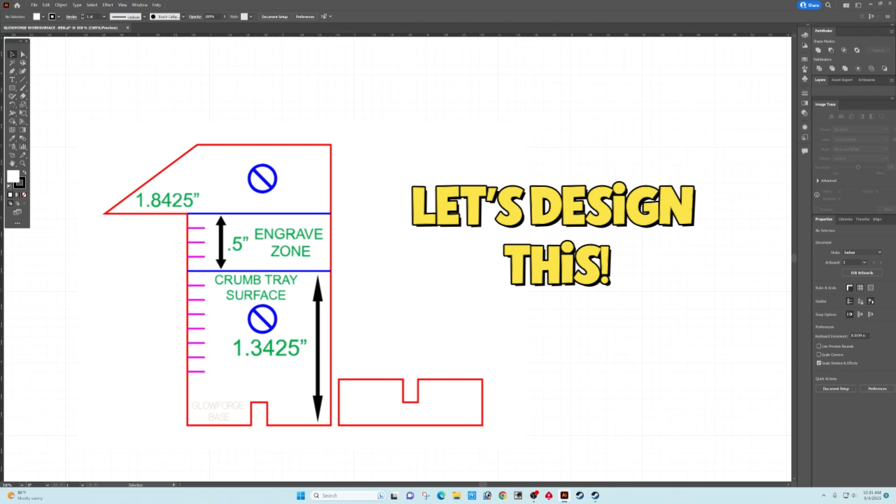Okay guys, I went ahead and opened up Adobe Illustrator. So let's go ahead and get started. The first thing I'm going to do before I do anything is I'm going to click on View and I'm going to scroll down to Smart Guides. I'm going to make sure that Smart Guides is checked because we want this Smart Guides tool to be enabled.

This Smart Guides will help us visually to align our paths together, because visually when you start to align two paths together, you'll have some pink lines that will light up to let you know that the two lines are exactly directly on top of each other. So it really does help. So let's go ahead and make sure that Smart Guides is enabled.

And another thing I want to say is I'm not an expert on Adobe Illustrator. I've only been using it for about 1.5 years. And if I can make this thickness gauge, I know you can too. So let's go ahead and continue.

Now I'm going to go ahead and select the rectangle tool, and I'm going to make a small little rectangle. And I want the width to be 1.25, which is 1.25 inches. So let's type in 1.25 inches. And I want the height to be the measurement that we calculated for the base of the Glowforge to the top of the crumb tray measurement.

And that came out to be 1.3425. But you're going to enter in the measurement that you calculated for your crumb tray height. So let's go ahead and type in that number, which is 1.3425 inches. So now we have our rectangle. So next, let's go ahead and copy this rectangle. So edit, copy, edit, paste, and let's paste this rectangle right over the top.

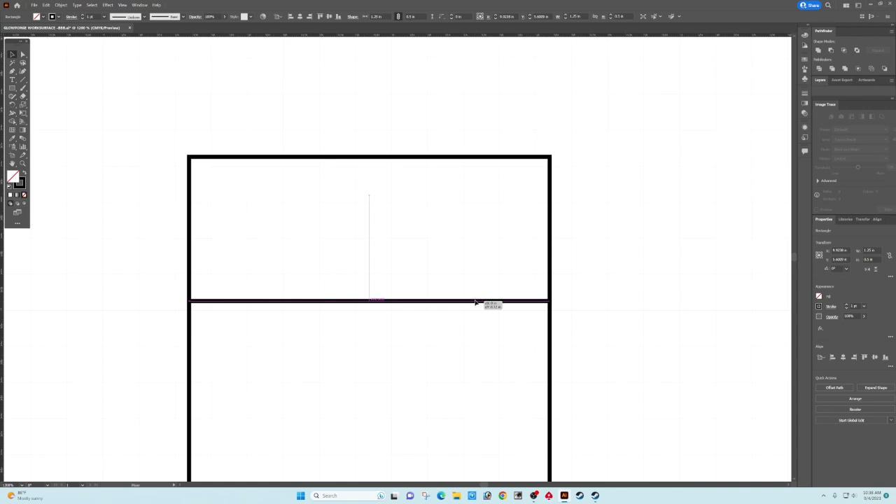So what I'm going to do now is I'm going to select the rectangle and I'm going to slowly start to slide it over, and you'll see when I get to the right placement, bam, right there you'll see that pink line light up. That is letting you know that the paths of both of these shapes are perfectly aligned. So let's go ahead and do that again. Let's bring it over. Bam, perfectly aligned. Now these two shapes are perfectly aligned.

So the next thing I want to do is select the top rectangle, and let's do edit, copy, edit, paste. And now let's place this bad boy up on top, and I want this measurement to be 2 inches wide. So let's change it to 2 inches for the width. And I want the height to be 0.6 inches. And let's make sure that the stroke size is 1. Okay, so now all the stroke sizes are the same.

So just like we did before, I'm going to zoom in on this. I'm going to bring this top rectangle and I'm going to line it up. You can see the Smart Guide lines kicking in. And I'm going to bring it down and wha-bam. So let's continue. We now have the basic shape of our thickness gauge. So the next thing I'm going to do is I'm going to make the tick marks.

So let's enable the line segment tool and let's press and hold the shift button and let's make a line that is 0.15 inches. And there you go right there. So we have one line made. So now we'll go ahead and select the selection tool again. And let's go ahead and copy that line.

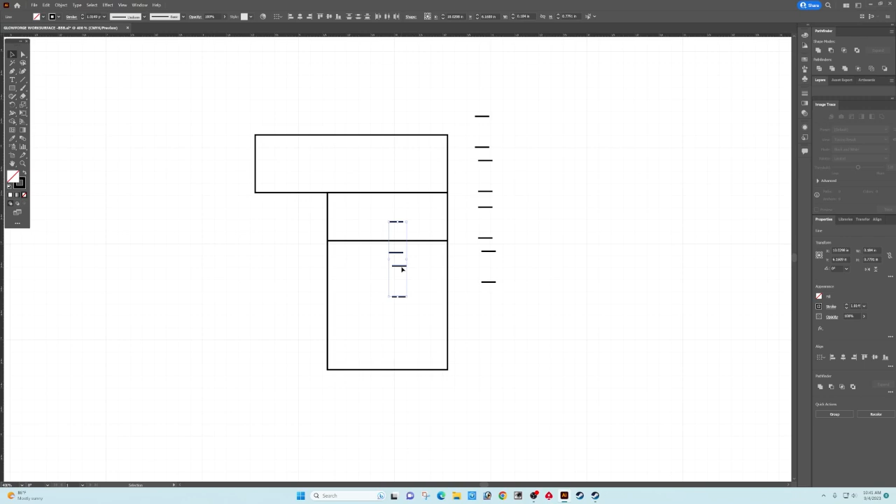So now that I have four, let's select these four, copy, edit, paste. Now I have four more, and let's go ahead and paste another four more. We're going to need a total of 12, so we have 12 right here.

Notice they're not spaced or anything, so let's go ahead and select them all. Let's do a horizontal align left, and now they're all aligned to the left. But I want them aligned vertically 1/8 of an inch apart as well, and this is how you do that.

Let's go ahead and select them all, and let's go over to this align window. There are 3 buttons on the bottom right corner of that align window, let's open that up. Here you can see align to, you have 3 options, and let's go ahead and say align to key object. It's going to align to the first tick mark.

Let's click that, and when you click it, it opens up this little window, and all you have to do is give it a measurement on how far apart you want these tick marks to be. I'm going to type in 0.125 inches, which is 1/8 of an inch. How do you want to space these, horizontally or vertically? Well, I want to do them vertical, so let's select vertical distribute space.

Now I'm going to click this, but before I click it, take a look at the lines. So when I click it, bam, they all get spaced vertically 1/8 inch apart. That's great, so let's go ahead and continue.

Let's go ahead and select all 12 of them, and let's change the stroke color from black to magenta, because I want these to be seen differently in the Glowforge based on color, which means it'll be a different process. Now that we have them all magenta, let's go ahead and group these together. Now the 12 tick marks are grouped together.

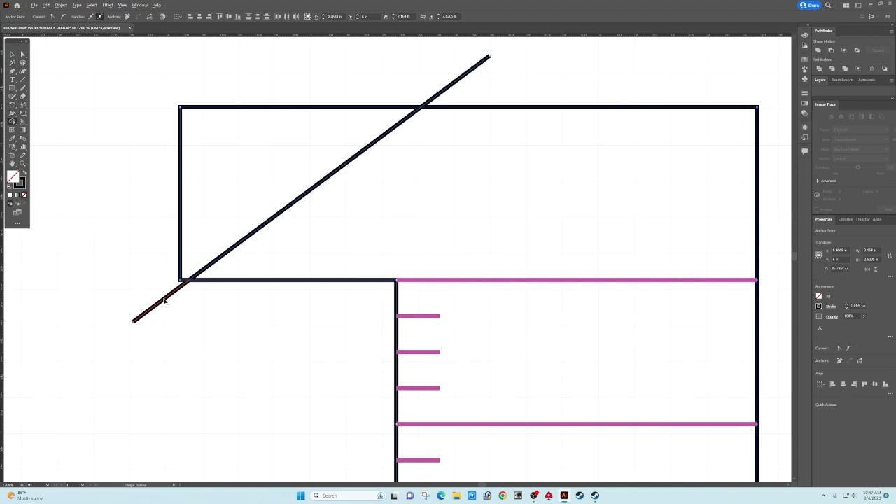So once we click on it, I'm going to press and hold the Alt button as I hover my cursor over the lines, and these lines are the ones I do not want. So when I click on it, the line will be deleted. Let me zoom in a little closer so you can see.

With my shape builder tool still selected, I'm going to hold Alt and hover over the line and it turns red, and when I click the left mouse button, bam, it gets deleted. Let's go ahead and do the same thing for this top line over here. Click and hold the Alt key, hover over it, and click it, it gets deleted.

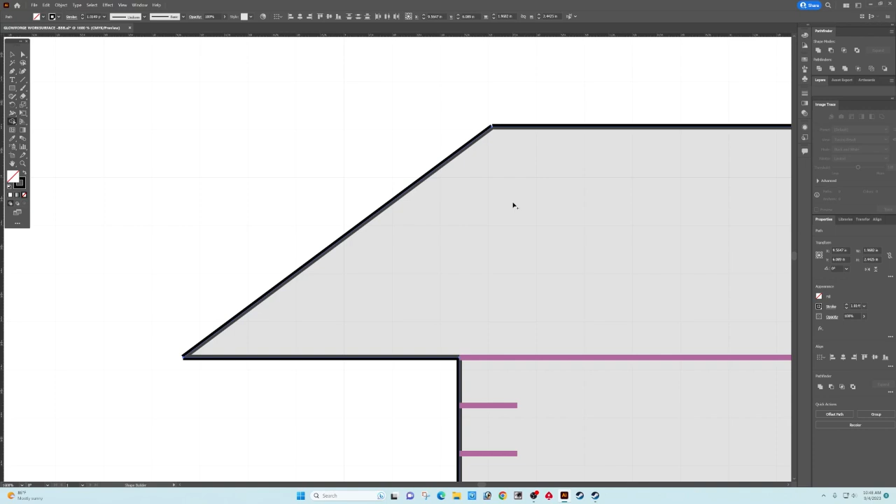Now you can see right here that this corner and this corner are open, so we want to join those paths. So I simply bring the cursor down into the triangle or into the rectangle, and when I click on the gray area, you can see how it joined my paths together. So right there we have the basic shape of our tool.

And the next thing I'm going to do is look at it, admire it, and let's go ahead and go on to the next step.

Okay guys, the next thing I'm going to do is make the stand that's going to allow this thickness gauge to stand on its own. That little stand is going to have a notch cut in it, and I'm also going to cut a notch on the bottom of the thickness gauge. When these two notches interlock, it's going to allow the thickness gauge to stand on its own. So let's go ahead and make that right now.

Let's go ahead and click on the Rectangle tool, and I'm going to make a rectangle. I want this rectangle to be the same width as the thickness gauge, and we've already determined that measurement is 1.25 inches. So let's change the width of this rectangle to 1.25 inches, and I want the height of this rectangle to be 0.4. Let's go ahead and make that change right there.

And there it is. Okay, so before we go any further, let's go ahead and select the selection tool, and let's move this over just to make sure that it fits. According to the smart guides, it is a perfect fit. So let's go ahead and make our notch now.

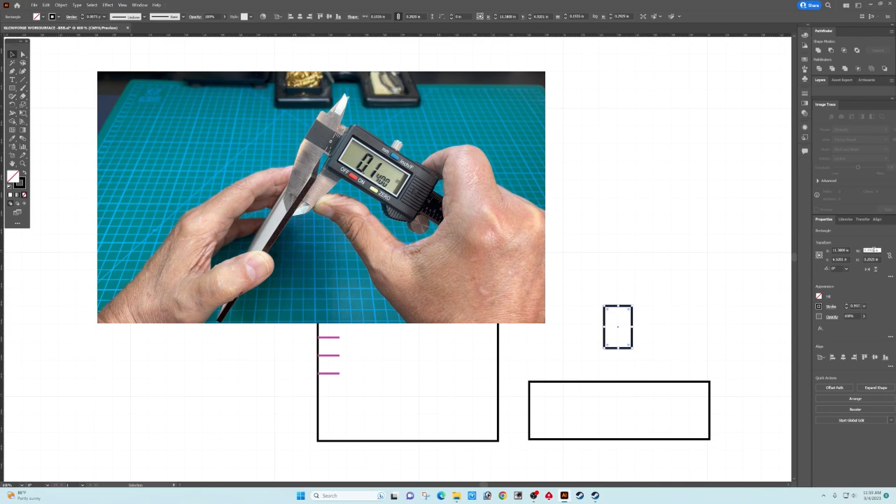So we're going to select the rectangle tool, and let's make a little rectangle. The width of this notch has to be the same width as the thickness of the material I'm going to cut this thickness gauge out of. I already measured the thickness of the material I'm going to use, and it's 0.14 inches. So I want this notch to be 0.14 inches, so I'm going to enter that in, 0.14 inches.

And we have that set. Now I want the height of this notch to be half of the height of this little rectangle here. So this rectangle here is 0.4 inches, so I want this one to be 0.2 inches. Let's go ahead and type in 0.2 inches. Now we have the size of the notch, so let's go ahead and put that there.

Let's go ahead and make sure that the stroke is 1 point on both of these, and I'm going to select both of them. Using my alignment tool, I'm going to select vertical align bottom, and now select horizontal align center. Where is that at? It's right there. Bam. Okay, so now it's center aligned and it's aligned on the bottom.

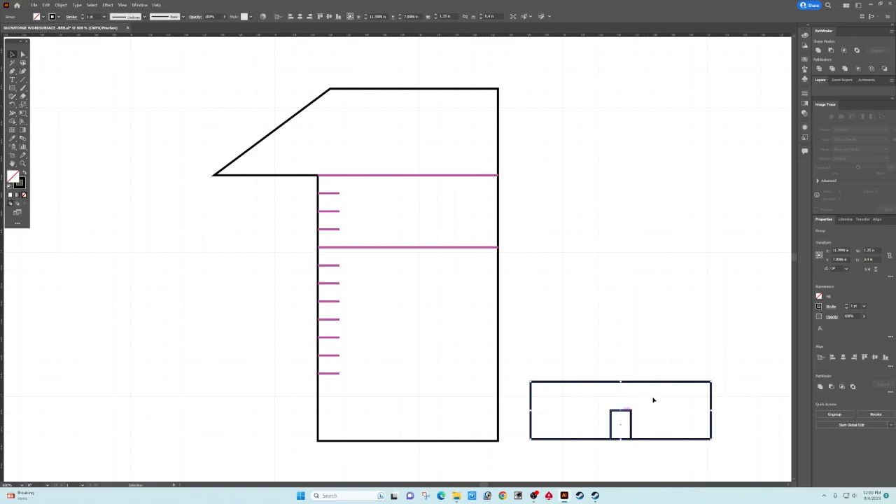So now that we have that done, let's go ahead and select both of them and group them. Once they're grouped, let's go ahead and copy them, do a copy, and let's do a paste because I'm going to need another copy of this. And you'll see why in a second.

Okay, so now let's go ahead and get this piece here that's grouped. Let's enlarge it a little bit, and let's go ahead and position this and align it right there. You can see with the smart guidelines that it's aligned center and on the bottom. So there we go. Now that we have it positioned, let's go ahead and select it and ungroup it.

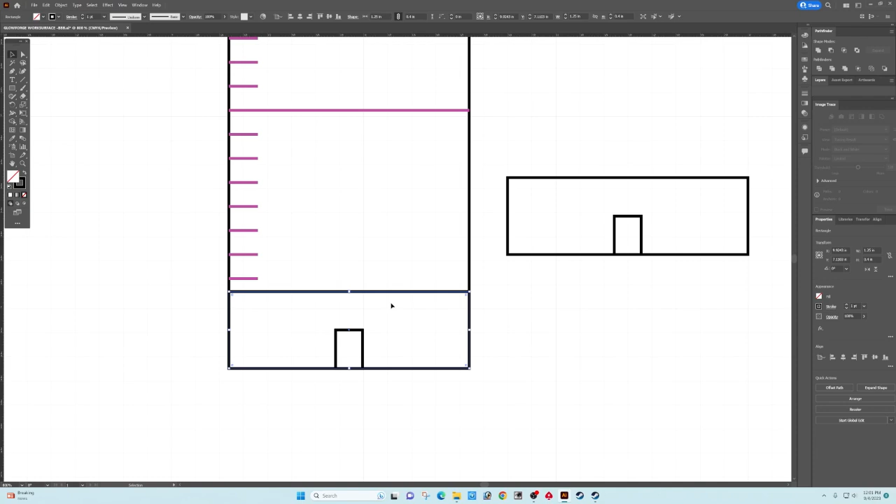Let's select the big rectangle and delete it. So now that's gone, and now we're going to want to use our shape builder tool.

Let's go ahead and select direct selection tool. Let's select this area here, the small rectangle and the larger rectangle. Let's click on shape builder tool. Now I'm going to press and hold the Alt button as I hover over the line that I want to delete, so you can see it turned red.

I'm going to click the left mouse button and it now deletes that line. So now if I hover over and change this area to gray, if I click on it, you'll notice, let's zoom in a bit, these two corners close the path. So let's click there, and now it's joined the paths together, which is a good thing. It's going to make cutting one easy step.

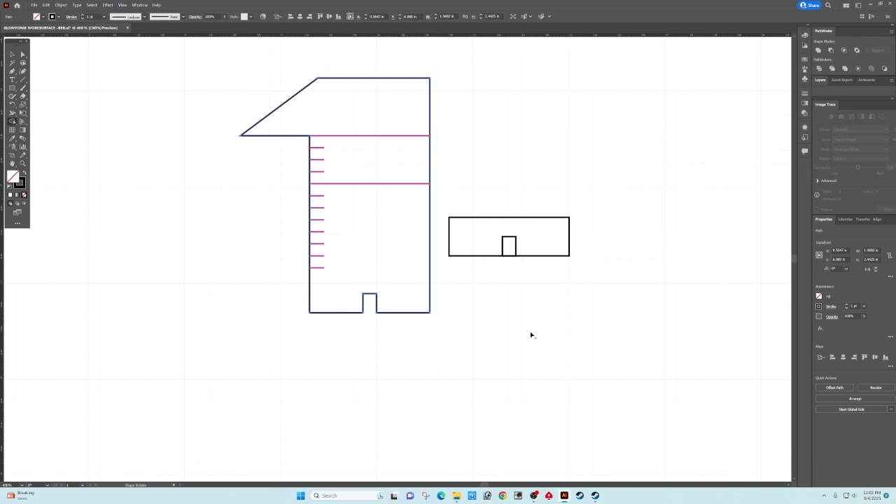Okay, so now that's done, let's concentrate on our little stand. Let's click on the selection tool and bring that down here. This is what I'm going to do. Let's ungroup it. Now that it's ungrouped, I want to make this little rectangle align to the top because we want it on top. So let's go to align, vertical align top, and let's do that. Now it's on the top.

Now that's done, we're going to change the width of this notch because I want the two notches to fit snugly. This little area here is going to fit freely, but I want to change the width of this one to adjust for the curve so that in one direction it's a tighter fit. Let's change that from 0.14 to 0.13. Bam, it makes it just a little bit smaller. So when it pushes in, it'll fit tightly on this side, whereas on the other notch it'll have a little more room to push in. But it's going to hold this rectangle in place.

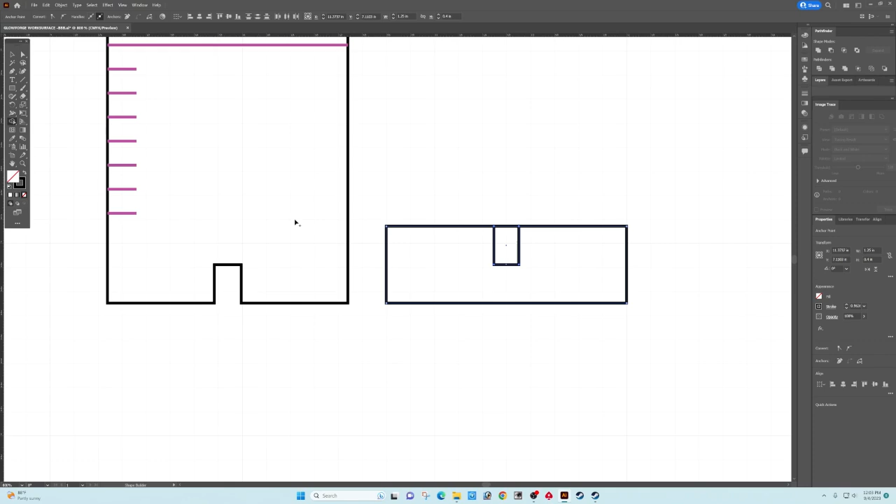So now let's click on the direct selection tool, click on that there, click on the shape builder tool, and let's do the same thing we did earlier. Press and hold the Alt button, as I hover over the line it turns red. Let's click it, bam, and you can see these two areas here are not joined. So if I hover over here and click, bam, these two areas are joined now.

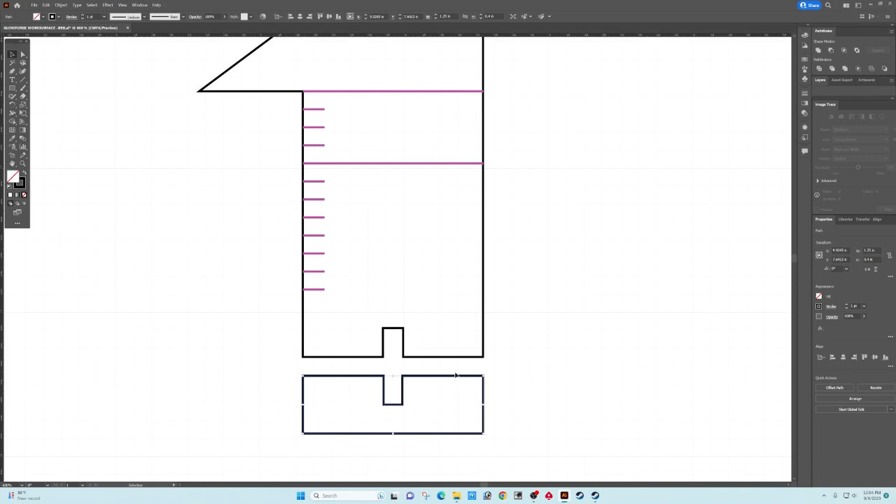So now this piece here, let's select our selection tool. This piece here is going to slide in just like that, bam, it's going to fit perfectly. You can see when I zoom in, one's just a tad bit smaller than the other, but it's gonna fit like a glove, and we'll like that when it's all said and done. So right there, we're almost done. Let's zoom in a bit, let's bring that over, bam, just like that. So now we're ready to go on to the next step.

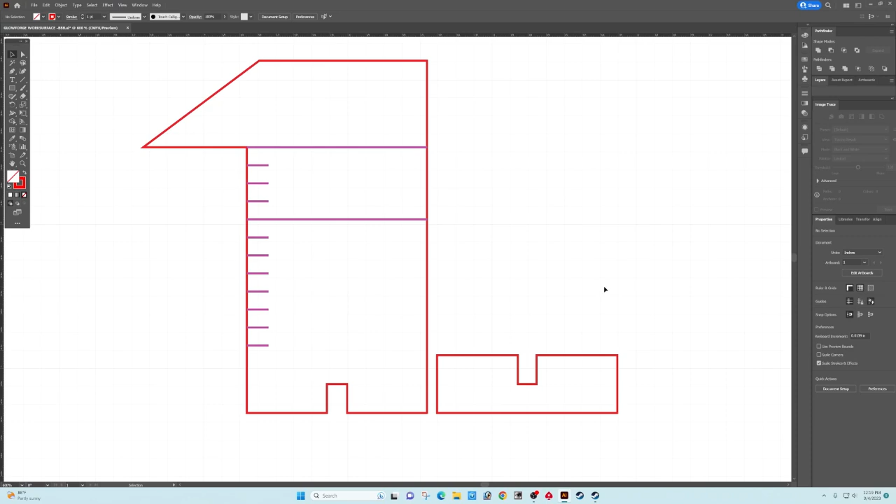Okay guys, before I go any further, I want to change the line color from black to red because I'm going to want the Glowforge to cut these shapes out. So let's change the line color to red. Let's select this shape here, go to stroke, and change the line color to red. Now let's select this shape and select stroke, and change the color from black to red.

And now when I create my SVG file and load it into the Glowforge, it'll see the red lines as cut processes. So now that we got that done, let's add some information to this thickness gauge.

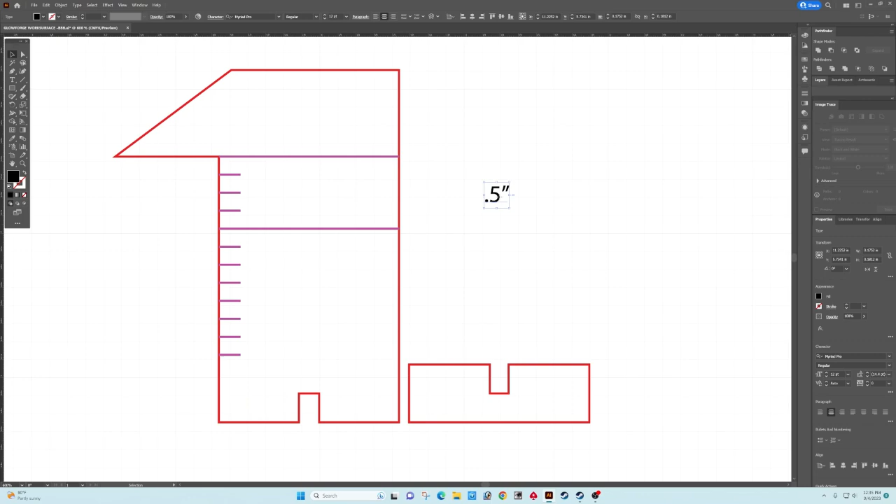Okay, now I'm going to click on Type Tool, click on the artboard, and now it's going to let me start typing. So I'm going to type 0.5 inches. I'm going to click on the selection tool, and now I'm going to drag this into our half-inch engrave zone. I'm going to select the type tool once again, click on the artboard, and type in engrave zone, and it is centered already, and I'm going to move this over into our engrave zone.

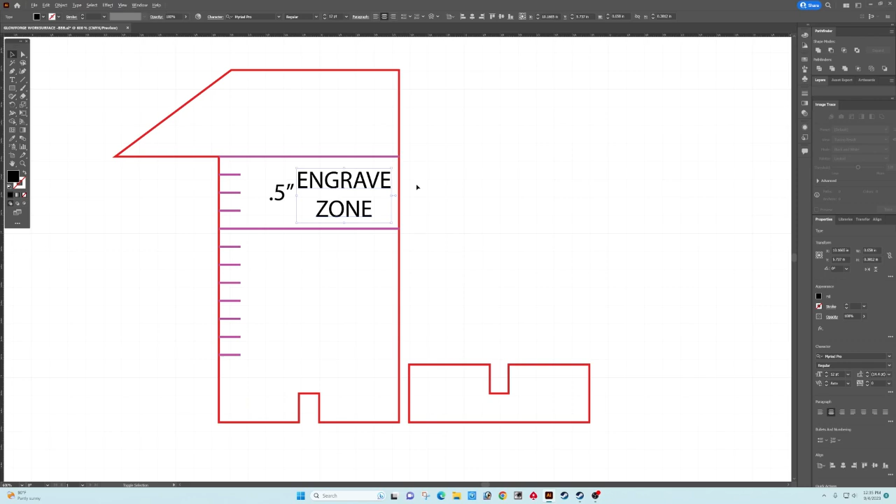Now that looks like it's a little too big, so let me select that. I'm going to press and hold Shift and Alt at the same time, drag it right here by this corner, and drag it down a little bit to change the font size. I'm going to position it to where I like it, and that's good enough right there. Whatever looks good to you, and this looks good to me, so I'm going to keep it.

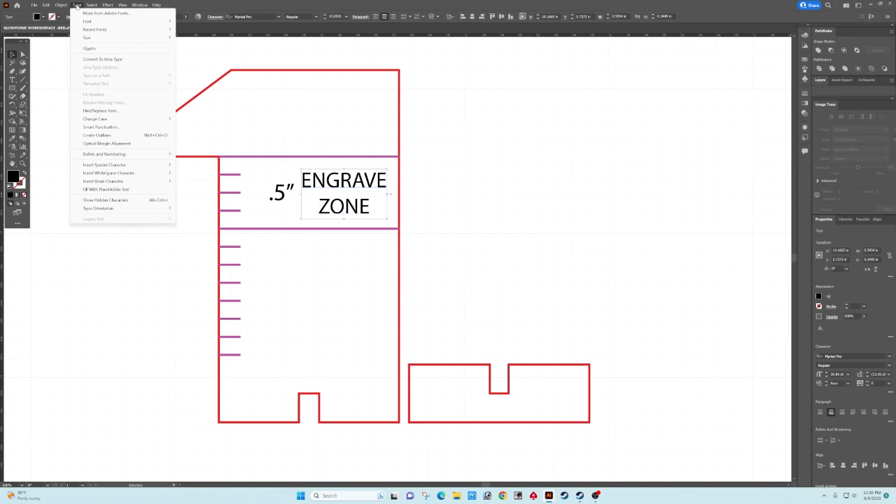Okay guys, if I was to enter this into the Glowforge right now, it would not recognize this text. We have to convert this editable text to a language that the Glowforge understands, and that's vector format. The way you do that is select it and create outlines. When you create outlines, that changes it to a language the Glowforge can understand. So now that this is selected, let's go ahead and select Type and Create Outlines. You can see now that it created outlines around this. So now let's go ahead and change the fill color to blue. Now when you enter this into the Glowforge, it's going to see this and engrave these letters right here. So that's what I want. Let's go with that.

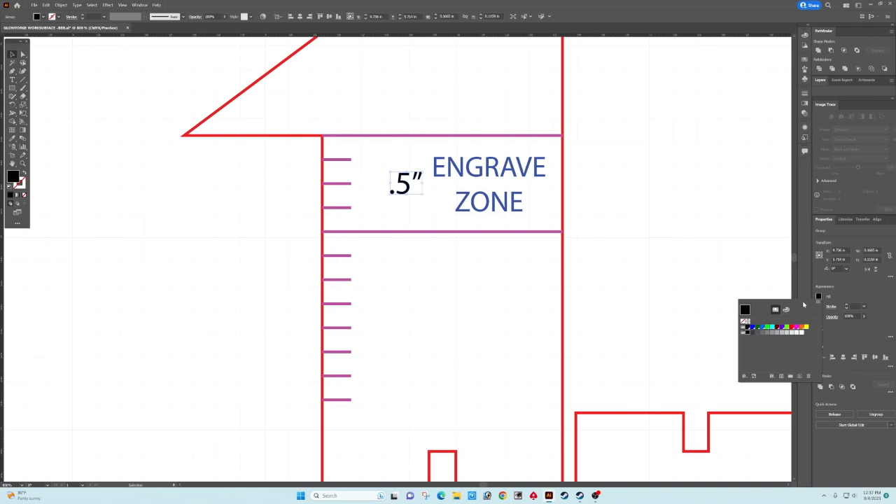Let's go ahead and do the same thing with the 0.5 inch, and let's change that to vector format, or create outlines. So we create outlines, and now that the outlines are created, we'll go to fill and we'll change this to blue, and that looks really good right there.

Okay, the next thing I'm going to do is design an arrow on this thickness gauge. So let's go ahead and select the line tool, press and hold the Shift button, and let's drag a line right here. All right, we have a line right there.

So I want arrows on both sides of this line. I'm going to select my stroke window, and let's drag it over here so you can get a better idea of what I'm doing. Okay, we have here arrowhead options, and this left one will put an arrowhead on the top, the right one will put an arrowhead on the bottom. So let's go ahead and select down arrow, and let's select the arrowhead that I would like.

Okay, I'm going to select arrowhead 5, and it puts an arrowhead on the top. Well, it's a little bit too big, so I'm going to click on scale and down arrow until I get to 60. All right, that's good right there. Let's do the same thing for the other side. Let's select arrow number 5 and scale it down to 60% to match the other one. Okay, so now they're the same.

So we can remove this and put it aside, and let's zoom in a little bit so you can see a little better what I'm going to do next. Now if I click on the line, you see a blue line going down the center, but you don't see any blue lines going around the arrows. So I just want to make sure I expand the appearance of the line to incorporate the arrows I just attached. If we click on Object, we're going to expand the appearance of the line.

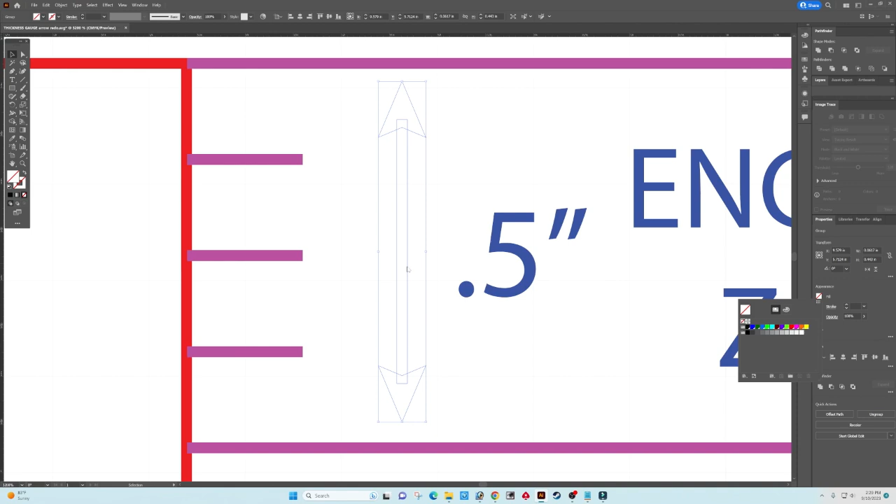So now the outline is around the arrowheads by expanding the appearance of the line. Now that we're done with that, let's select it once more, and we'll say expand it, say OK, and now it expanded the line. You can see that because if we remove the fill color, you can see three different shapes - two arrows and the line. So let's fill it back up. And now we will say we want to ungroup it. Now that it's ungrouped, we have three different shapes and the line.

So let's go ahead and undo that, put them all back together, and select all the shapes. We want to unite these shapes so it can become one solid shape. So let's go to Pathfinder, click on Unite, and now you can see it's one solid shape. Let me remove the fill color - you can see that it's one solid shape. Let's go back and set the color now to blue, which will mean that the Glowforge will see it as an engraved process. So that wasn't too hard to make an arrow.

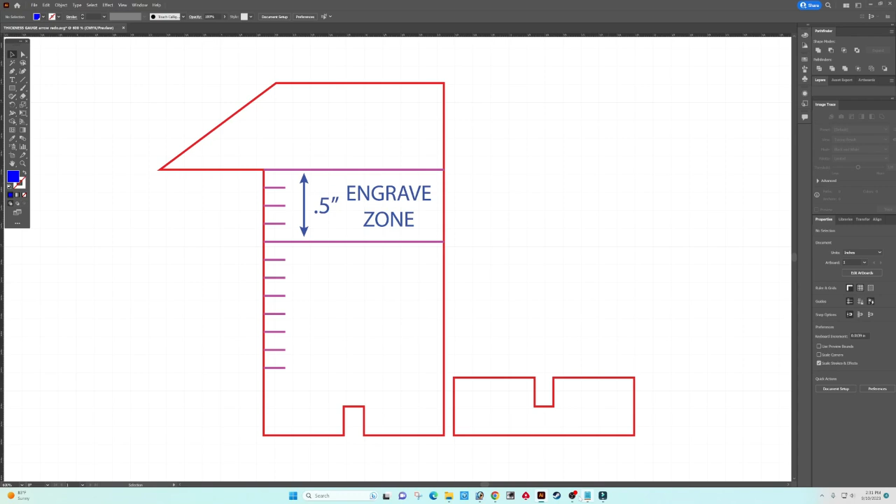So now what we're going to do, let's go ahead and hit our direct selection tool. Let's zoom out a bit. And now I'm going to put it into fast forward and finish adding all the information to this gauge using all the steps and procedures that I did for the engrave zone area. See you in a few seconds.

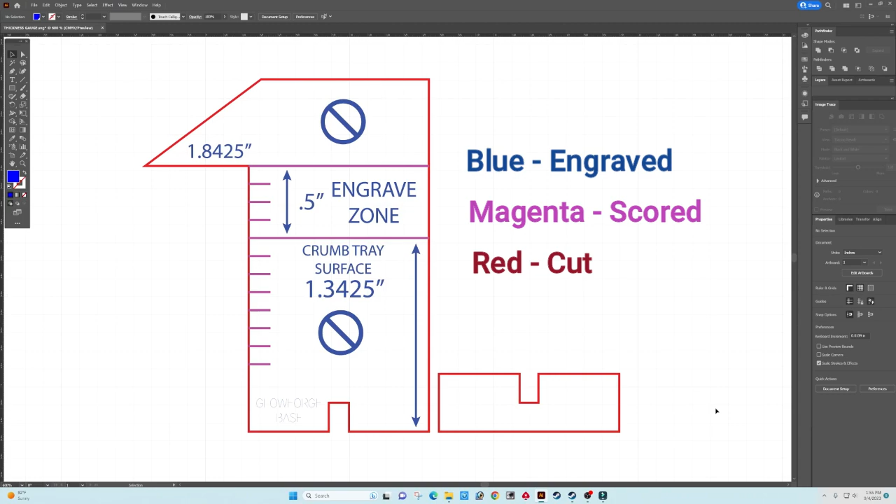Okay guys, I'm pretty much done with this design. Everything that you see that is blue will be engraved, everything that is magenta will be scored, and of course the red lines are going to be cut. So let's go ahead and save this as an SVG file and load it into the Glowforge, and let's go ahead and cut this baby out.